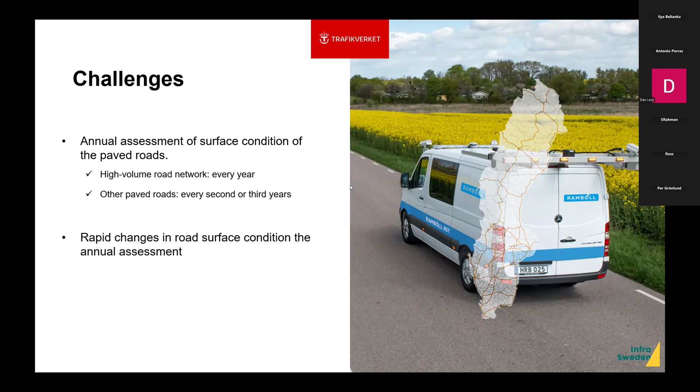As I said, this is an R&D project aiming to develop and evaluate one or several technical solutions for the systematic assessment of rapid condition changes. The focus is on floating car data from connected vehicles and using artificial intelligence.

It's also worth knowing that from the beginning, the project's focus was on potholes, frost damages, and winter damages. For those damages, we believe there are already technical possibilities to assess and identify them using connected vehicles.

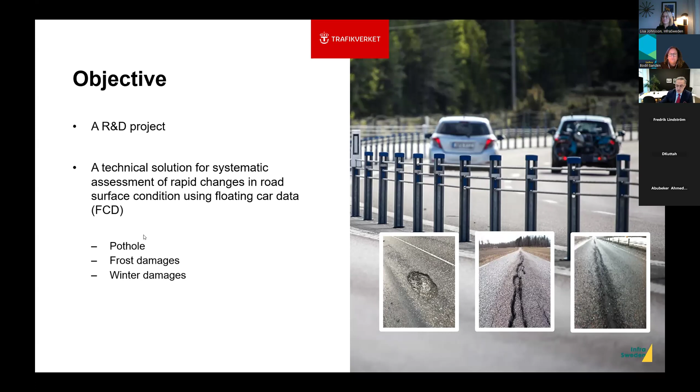So the project started in 2022 with an innovation procurement, including development and evaluation of the technical solutions.

Under the first phase, the procurement was announced by Trafikverket, asking for a declaration of interest. As Fredrik said, this was an innovation procurement. In this phase, 14 applications were received by Trafikverket, and after a qualification based on 2 parameters, 12 of the companies were qualified to phase 2.

The requirements were basically access to an existing vehicle fleet and reference from similar projects made by the suppliers or bidders. Phase 2 started by creating a more detailed procurement documentation by Trafikverket with specific goals and requirements that must be fulfilled by the bidders. The procurement was later announced, and 10 bids were received by Trafikverket.

In this phase, a qualification process started based on a combination of maximum price and added values. The added values were calculated based on maturity of the existing solutions and the plan for development of the solutions during the project.

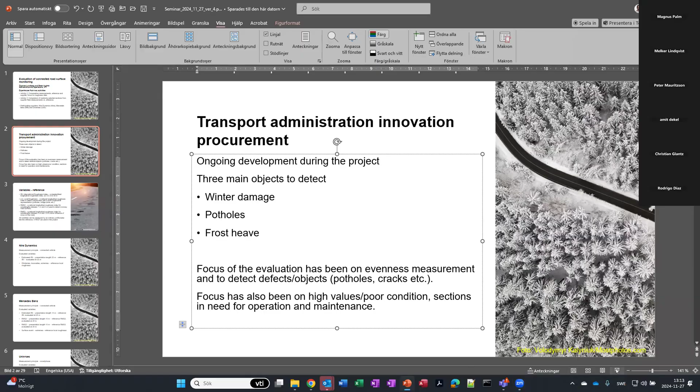Thank you, I will try to start the presentation. Looking good so far, yeah, so far so good.

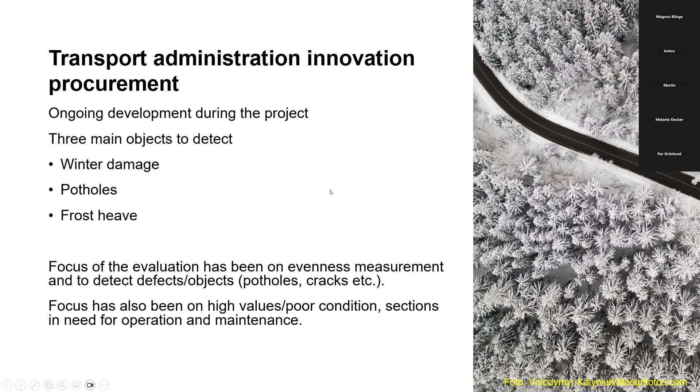My name is Thomas Lundberg, and I'm working at VTI at the Department of Maintenance and Operations. This presentation has been done by me and my colleague Peter Andrén. I will tell you some details about 2 activities we have done in this project.

Activity 2 is comparative measurements with reference and the supplier, and activity 3 is a randomly selected test fleet measurement of the supplier versus the reference. As you have heard, the suppliers are Nira, Mercedes, and Universes, and in the presentation they will be named suppliers. We have worked on this project for about 1.5 years on commission of the Transport Administration.

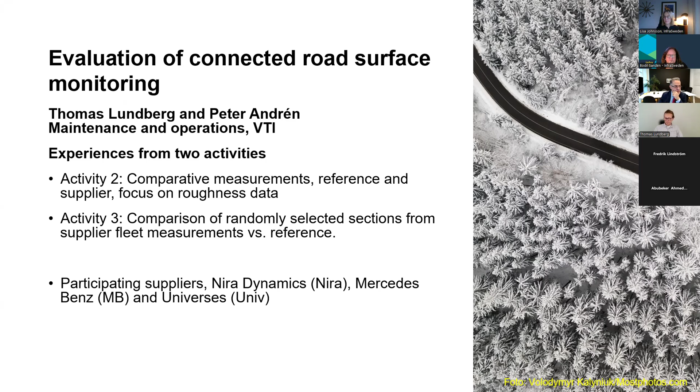I also have to mention that there has been constant development from the suppliers during the project. Products have been improved, and there are also new products from the suppliers that have been worked out during this 1.5 years.

The focus of the evaluation has been to look at the evenness measurement from the suppliers, but also to see the possibilities to detect defects like objects, potholes, and cracks, and so on. The focus has also been to see how the suppliers could detect high or poor condition sections in need of operation and maintenance.

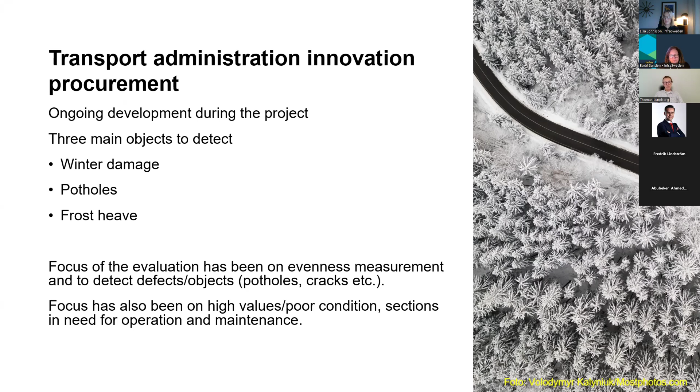The variables we have used to compare the reference measurement car with the suppliers are IRI, the International Roughness Index. It's a standardized longitudinal evenness measurement index describing the evenness in the wavelength band from 0.5 to 30 meters approximately.

We have also used the local roughness index. It's a national longitudinal roughness index that detects unevenness with a short longitudinal representation length, like potholes, bridge joints, etc. And also two RMS values, 2 and 3, as they're called.

RMS2 describes evenness defects in the wavelength band from 1 meter to 3 meters. It has been used to detect a snowy road surface by comparing a bare road with a snow road.

The RMS3 describes evenness wavelengths between 3 and 10 meters. It's really used for good detection of frost heave.

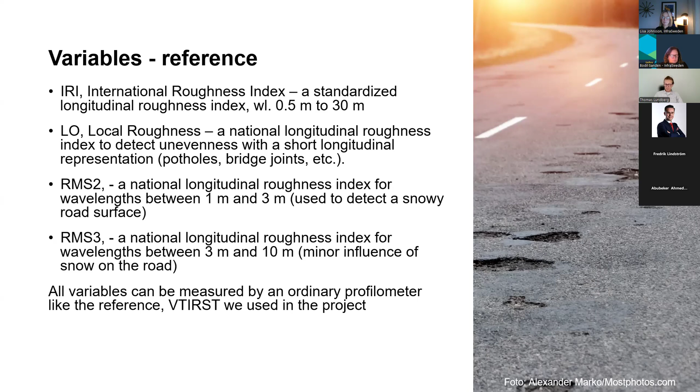The IRI values from NIRA are presented at 25-meter presentation length, and the reference for that is, of course, IRI when we are comparing. But also obstacles or anomalies from NIRA Dynamics, that's a way to detect extremes at the road surface.

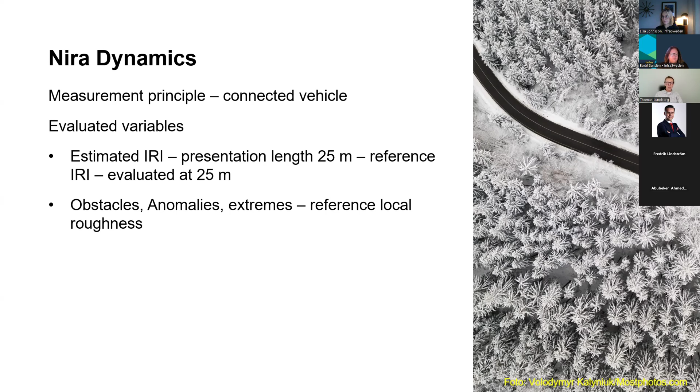And the reference for this is the local roughness index.

From Mercedes-Benz, we have evaluated the IRI value. They give an IRI value at 10-meter presentation length, and we have evaluated the IRI at 20 meters, so we have made an average up to 20 meters, of course.

They have also delivered, and we have evaluated, the RMS2 value and the RMS3 value, but also something called the surface event, which is extremes like the NIRA anomalies. We have used the local roughness index for reference there.

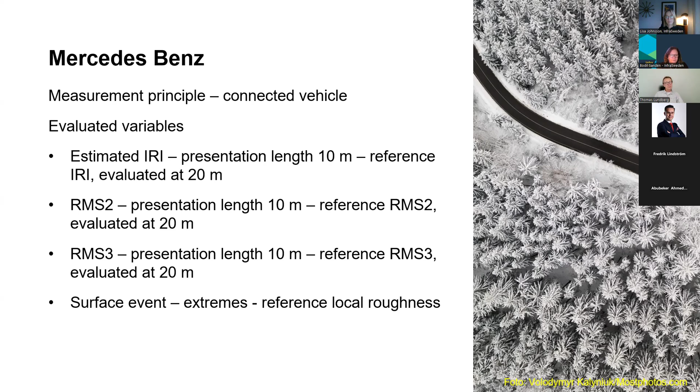From Univrses, we have evaluated the potholes. They give the pothole as a geometry, and you can calculate an area of the pothole and get some severity rating of that. We have used as reference the local roughness index, evaluated at 20 meters, and also visual inspection to verify the results.

Univrses also has a measure, an index called the damage level, that describes an overall damage level of the road section. The reference for this has been visual inspection.

Finally, cracks: the geometry is given by Univrses, and the reference for this is visual inspection. Univrses has also developed the index RMS3 at a presentation length of 20 meters, and we have, of course, used the RMS3 from the VTI RST reference vehicle.

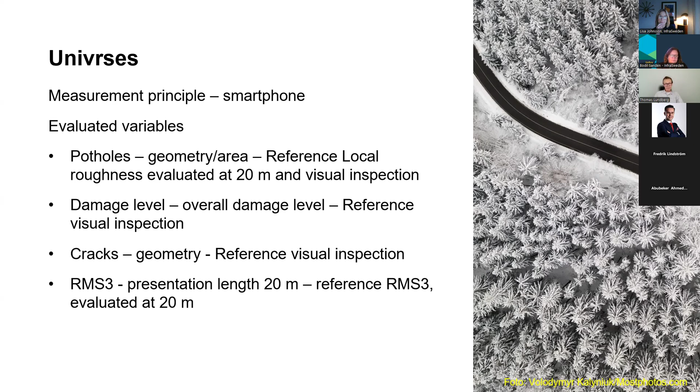So let's describe the first activity. The purpose of this activity is to establish a good comparison between the reference and the supplier data.

For that reason, we have done dedicated supplier and reference measurements in Dalarna. It's not necessarily the same variable compared between the supplier and reference, but in those cases where we can compare the same index, we have done that. For instance, for the potholes detected by Univrses, we have used the local roughness index to compare with.

As I said, VTI RST is the reference. It's a standard measurement vehicle used for network road monitoring for the Transport Administration.

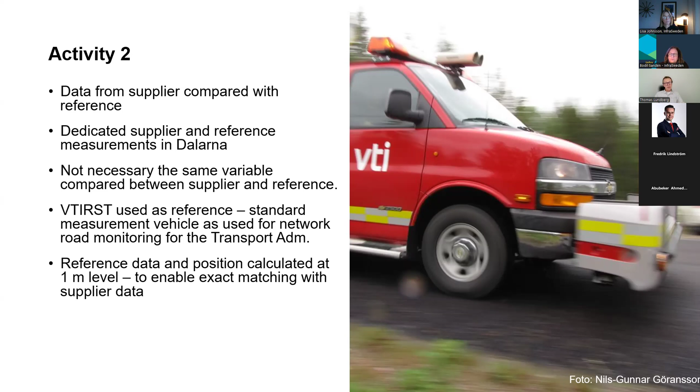We have calculated the data and position at a 1-meter level from the reference, and this enables an exact matching with the supplier data since we have coordinates for all data from the suppliers. Then we can match the exact position from the reference with the suppliers, and in that case we could do a very good matching of the data.

Activity 2: there were 4 road sections selected in Dalarna, and there were 3 sessions. September 23 was good condition, summer condition, and then winter conditions in March and April 24. Sections A to C were measured in all sessions, and D was only measured in the 24 session.

Every supplier and reference did 2 measurements per session. That gives a total of about 500 kilometers measured each session for each supplier and reference, of course.

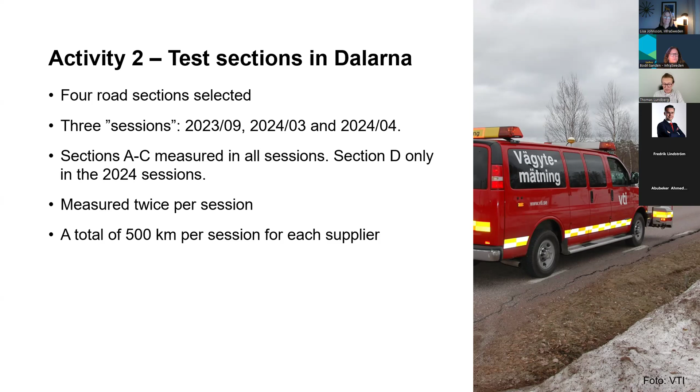So this is the sections. It's close to Mora, where we started the measurement. Section A was north at road 70, about 82 kilometers. It's a road with quite good condition.

We had an IRI value; you can see the IRI value in the table here. It's 1.28 in the summer conditions, September, so it's quite a good road.

Then section B, a smaller road, I would say an uneven road, IRI about 2.4. And finally, in the north, section C, a very uneven road with an average IRI of 4.2, 4.3.

Section D was added in the winter, so we didn't measure that in the September measurement. That's a road that is partly very even and partly very bad, with so-called winter damages, an IRI in the winter condition of about 1.8 millimeters per meter.

This is the increase in percent between the winter condition and the summer condition, so approximately between 10 and 20% higher IRI values we got in the winter condition.

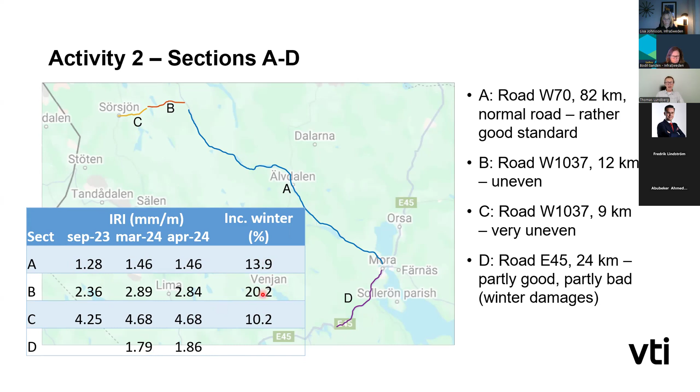We have tested the suppliers with 3 methods. The first is something we call the rank method. In this method, we rank the supplier and the reference, and we compare the ranking. So we look at the ranking from the reference, then see what ranking the supplier has, and compare those measures.

We also have a method called the normalize method. In that method we try to normalize the supplier to look like the reference as good as possible. I will explain that a little bit later.

We have used limits of 0.5 millimeters per meter for IRI to get an approved, so-called approved value from the reference, from the supplier. And for RMS 2 and 3, 0.2 millimeters and 0.4 millimeters. For the rank method, we have a limit of plus minus 15% of the ranking from the reference. That's okay for the supplier.

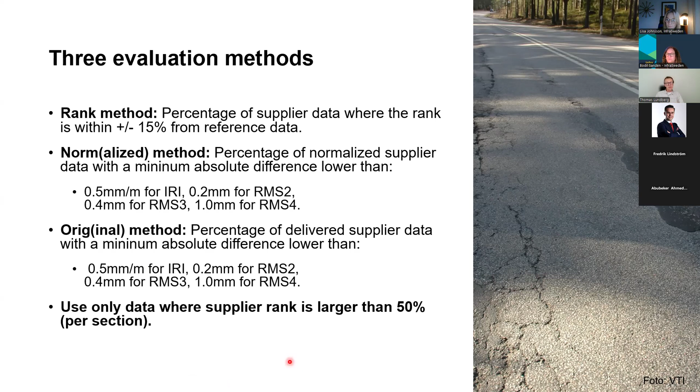But we also have compared the original data between the supplier and the reference, using the same limits as described above. And one final thing: we have only compared the data where the supplier has ranked the measures as bad, so the 50% highest ranked values have been evaluated.

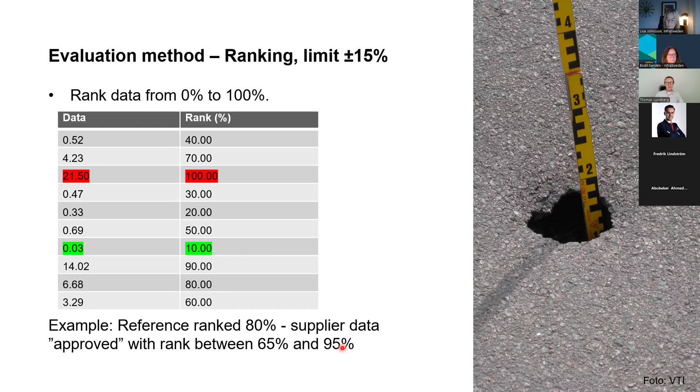So in the ranking method, you have the data, and then you rank the data from low to high, so the highest value gets 100% and the lowest 10% in this case. So if the reference is ranked 80% at this section, the supplier data is approved with a rank between 65 and 95%. That is the plus minus 15%.

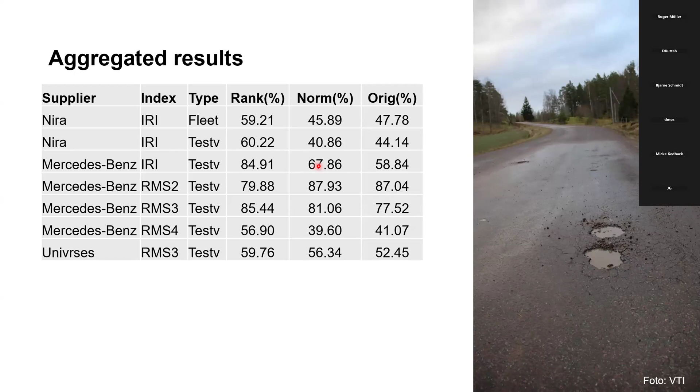The normalization method - for example, this explains that 67% or 68% of the Mercedes-Benz IRI measurement was within 0.5 millimeters from the IRI at the normalization method. But the original data in this case was about 59%. So I would say this is overall good results for all suppliers.

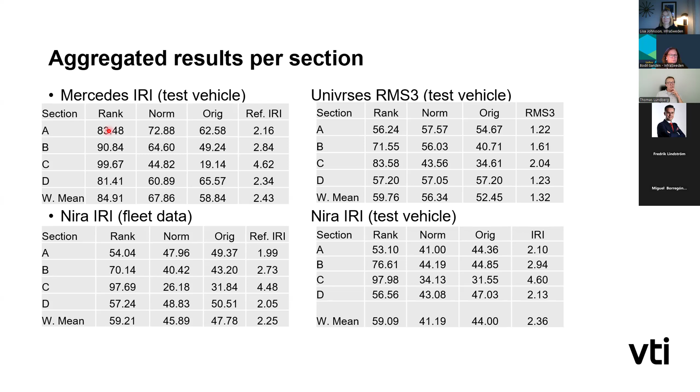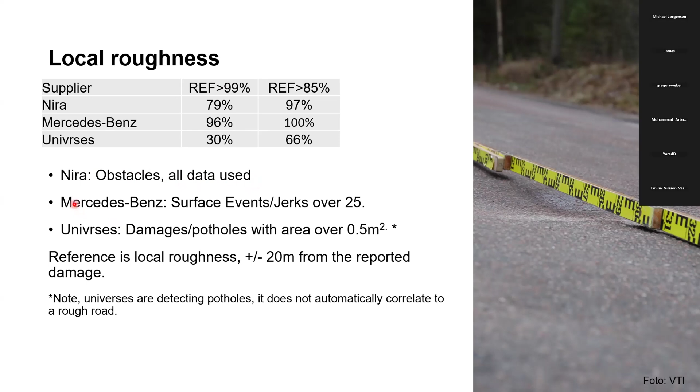We have also looked at the local roughness values from the suppliers. In this analysis, we have looked at the agreement between the top 1% in this column, where the reference has located the top 1%, and compared that with NIRA's obstacles, where we have used all data detected from NIRA in this category. From Mercedes-Benz, we have used the surface events or jerks, selecting jerks or surface events over 25. And from Univrses, we have looked at potholes with an area over 0.5 square meters.

I did a note of that. Universes are detecting potholes, but it does not automatically correlate to a rough road. So that's not as fair a comparison as the others.

But if you look at this column, it's the top 1% highest local roughness values from the reference. In this case, Mercedes-Benz had 96% detected jerks over 25 in this category, so it's a very good result. NIRA had about 80%.

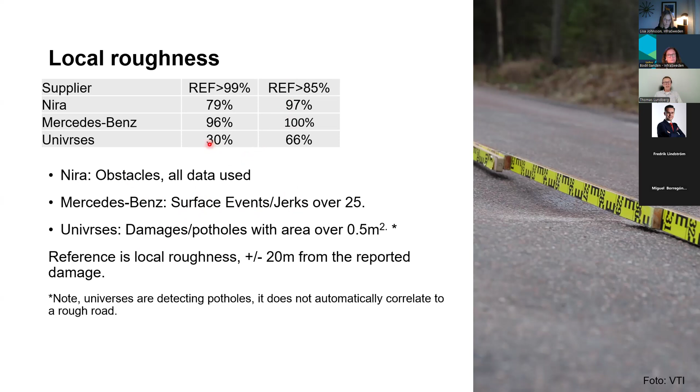This is the category where we looked at the 15 highest percent of the local roughness values. In this category, both NIRA and Mercedes had almost 100% for their surface events, damages, obstacles, and surface events. So I would say this is a very good aggregated result on the local roughness detection.

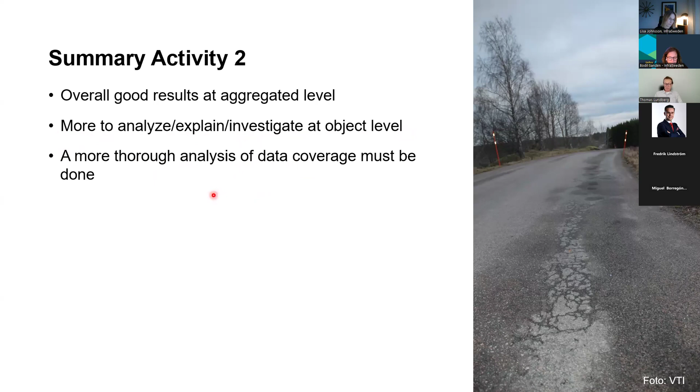If I should summarize activity 2, overall it's very good results at aggregated level. There can be done more analysis, explaining or investigation at object level—it's a little bit more to do there. And a more thorough analysis of data coverage must be done. So overall, it's really good results.

In activity 3, we have compared the VTI RST and the supplier fleet data. We got access to fleet data from suppliers in Dalarna and Gävleborg län. We randomly selected 10 sections in 3 categories of the supplier fleet data. Level 1 was road sections with some or minor defects—2 sections selected. Level 2 had some defects, a little bit higher ranked, 4 sections. Level 3, severe defects, 4 sections.

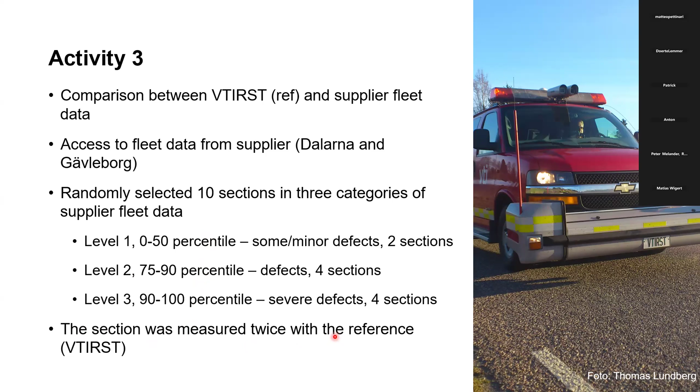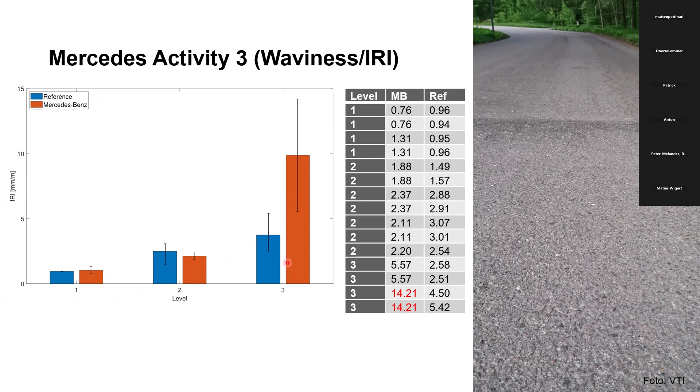So every section has the same supplier data, of course, and we did 2 reference measurements, so this is a repeated measurement on the same section. But it was a very good result, a good comparison between the different levels of roughness between Mercedes-Benz fleet data and also IRI from the reference.

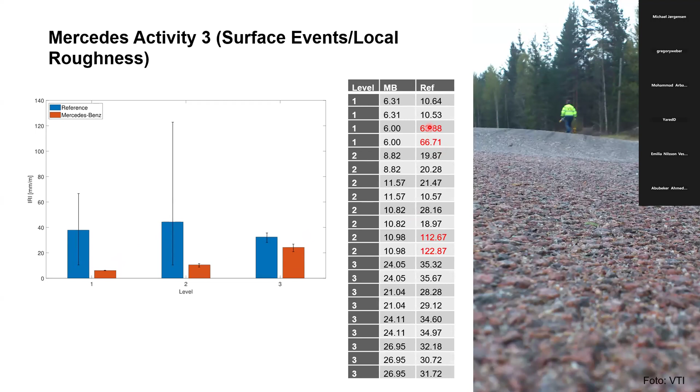For local roughness, there were some outliers, I would say. Some sections had very high local roughness from the reference that was not detected by Mercedes-Benz. Also in category 2, there was one section especially that had very high local roughness values. So in this comparison, if you count out those outliers, I would say you had a quite good agreement there also.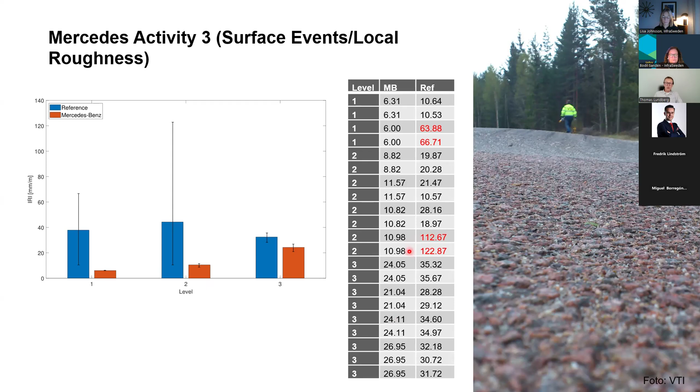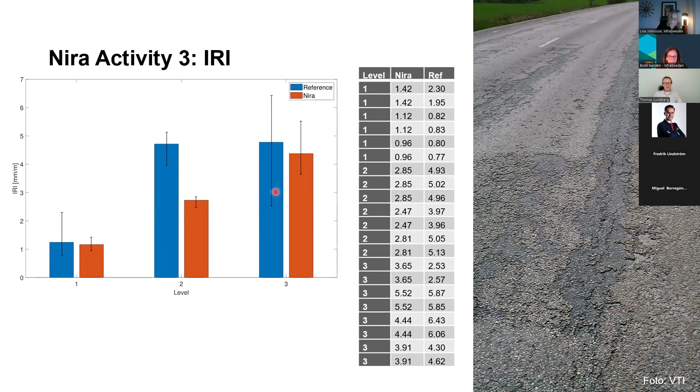NIRA activity 3: the IRI comparison between the reference and the fleet data from NIRA. Quite good agreement. Level 2 and 3 was not easy to detect any difference from the reference measurement—they were quite the same level, but the most uneven sections were detected as uneven from the reference also.

And finally, the anomalies, local roughness from NIRA. We have a very good agreement between the local roughness from the measurement vehicle reference and what NIRA has pointed out as anomalies in the data.

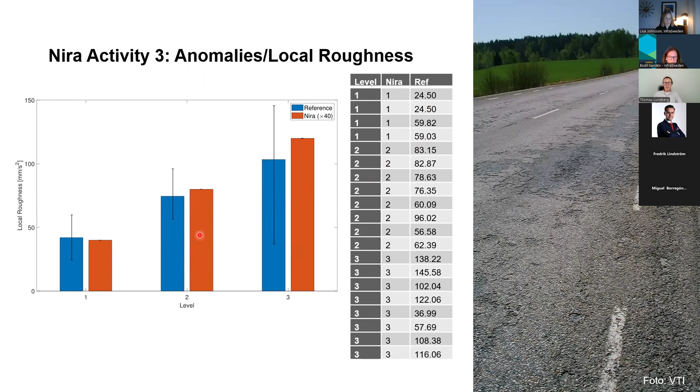For Univrses, we have looked at data from Gävleborg and looked at 3 variables: damage level, which is a kind of overall road condition in 3 levels, potholes—area of pothole—and cracks. We have only done some short evaluation of that, and these features have been compared with visual inspection.

Trafikverket had done the visual inspection and rated the sections in 3 categories. There were 10 sections with damage levels at different levels, 10 sections with potholes, and 10 sections with cracks that were visually inspected and rated by the visual inspection also. Then we compared the visual inspection with the damage level, pothole, and cracks.

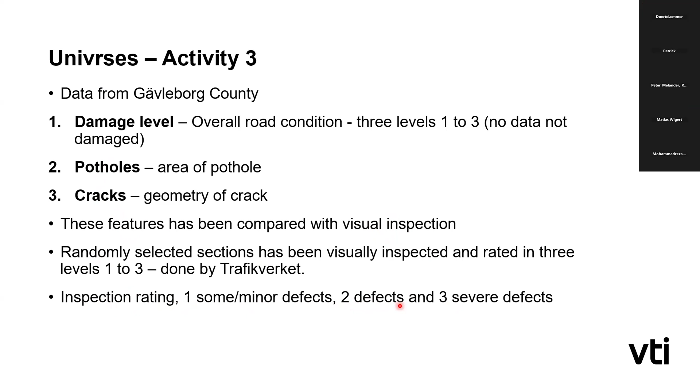The inspection rating was 1, 2, and 3. Level 1 was some or minor defects, level 2 was defects, and level 3 was severe defects.

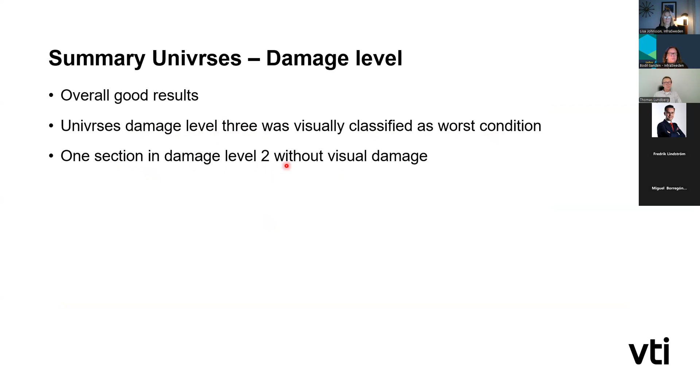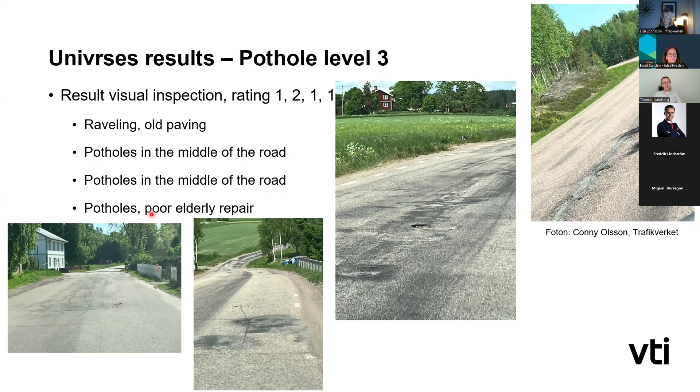And finally, results for potholes, level 3. The results from visual inspection was rating 1, 2, 1, 1. The comments from the inspector were raveling, old pavement, potholes in the middle of the road, potholes in the middle of the road again, and potholes poor elderly repair. So overall, it's a good result for the pothole detection. There were not always potholes detected at the sections; it could be that they had been repaired. Univrses pothole level 3 had potholes in 3 out of 4 sections, so that was really good.

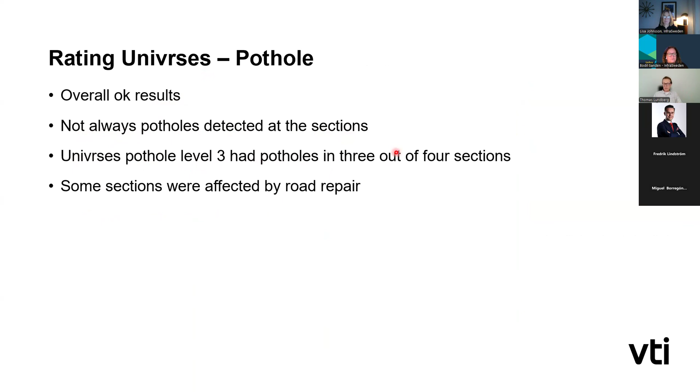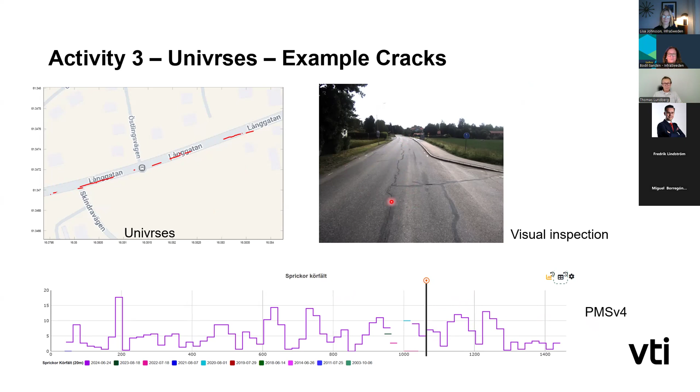Now, thank you for your attention.

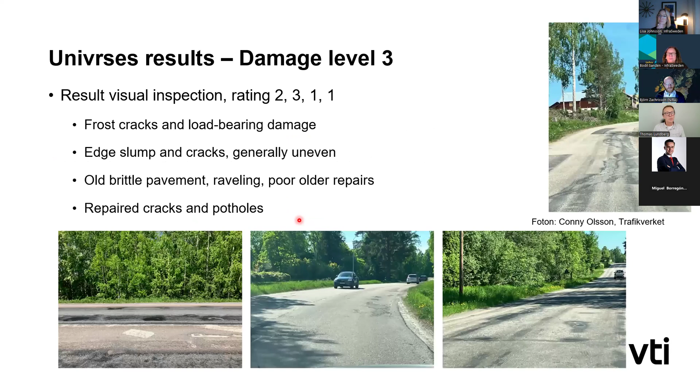You mean at, let's see, in this one? Yeah, exactly, in this case it's the fleet, and all the other ones are single vehicle. And this is the single vehicle, yeah. Okay, yeah.

We have fleet data from Mercedes-Benz also, but we have not had time to do that analysis. Yeah, no, I was just curious because I didn't have time to read, because I was listening at the same time. Yeah, thank you.

Let's see, I added some slides because I think it's always nice to be able to show something. But let's see if it works at full screen. Can you see my screen? Perfect.

So the idea was to talk about things that are not within the project. One of the things we've been looking into is lane marks or road markings. I'll do a quick run-through of things we're doing outside of this project's scope. This is something we can typically observe - this is a road on the highway in Sweden, and I've been commuting this one for two decades, so I know it by heart, and I also know why it looks like it does.

What we can see here, number one, is that we're flagging it as poor visibility on lane markers because it's red, and as we can see in the image, there are no lane road markings. Then in number two, they are back visible again, seen also in the interface. And in picture number three, all within a couple hundred meters, they are disappearing again. I wanted to bring up the phenomena behind it just to showcase things we can do beyond the scope of this project.

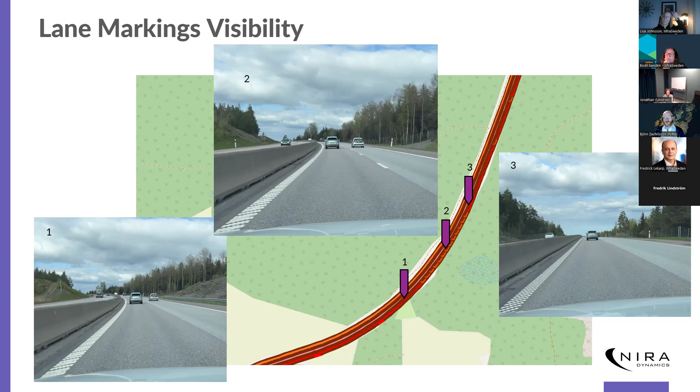So kind of expanding or learning from other projects - this is also something we're doing with the Swedish Transport Administration. Here's another picture of how it can look when it's completely gone, and another view where we just empty out the lanes - different ways of visualizing it, but also giving examples of how you can perform a screening. Saying the exact number of how visible they are is really hard, but doing a screening to say where visibility is good and where it's really bad, or where it has changed, that is much easier. That's what we want to support - a network-wide screening of lane marking quality on all the roads.

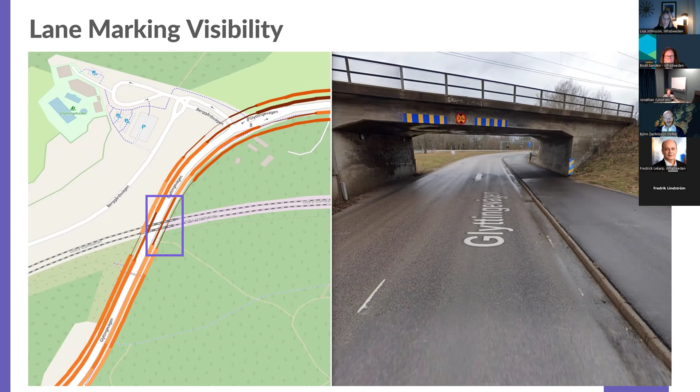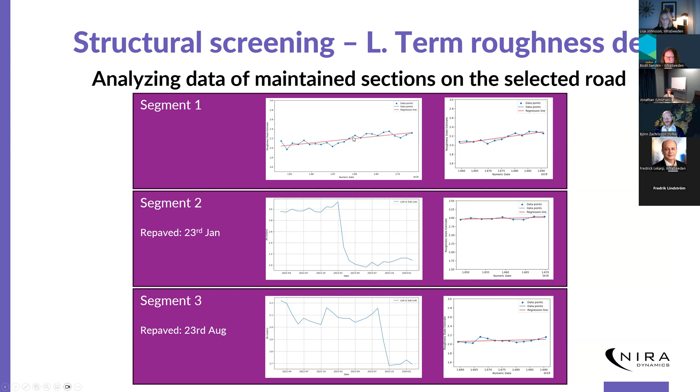Something more closely tied to what we're doing is the structural screening. I mentioned it briefly, and this is something we spent a lot of time on after we came across this example of a road with three segments - one was repaved in January and one in August, and the third one wasn't repaved, even though these three are adjacent to each other. So two went out and repaved the section, but the third one wasn't.

It was different timings, due to the roads passing a certain threshold, and they fixed them. But if they were able to use the information after the winter - this is not from Sweden - it would be possible to identify a longer schema and optimize the budget to do all three of them, because if you look at segment 1, it has the worst trend over this period of time, so the degeneration is at its highest there.

Either you can do an inspection with a falling weight deflectometer, a real one, or you can just add another layer of asphalt, or Fredrik would probably have a better answer what to do if you don't do an in-depth analysis. But the same way, you can identify the places that don't need any inspection or extra care on the road. So this leaves a pretty small band of areas that you have to go and investigate if you want to set some thresholds.